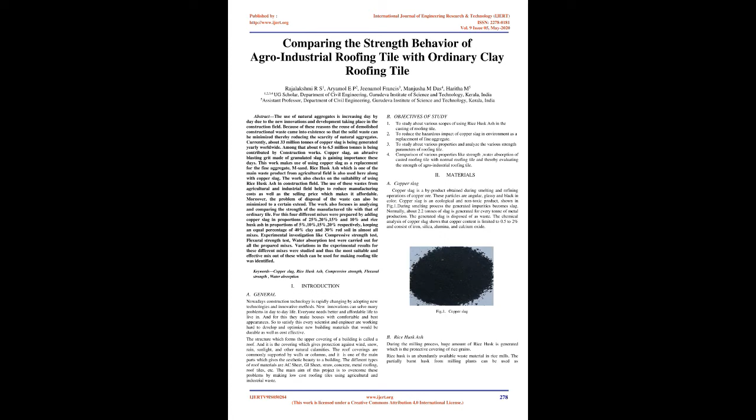The structure which forms the upper covering of a building is called a roof. Fig. 1. Copper slag. It is the covering which gives protection against wind, snow, rain, sunlight, and other natural calamities. The roof coverings are commonly supported by walls or columns, and it is one of the main parts which gives the aesthetic beauty to a building.

The different types of roof materials are AC sheet, GI sheet, straw, concrete, metal roofing, roof tiles, etc. The main aim of this project is to overcome these problems by making low-cost roofing tiles using agricultural and industrial waste. During the milling process, a huge amount of rice husk is generated, which is the protective covering of rice grains. Rice husk is an abundantly available waste material in rice mills.

The partially burnt husk from milling plants can be used as fuel in the boilers for processing of paddy. It is also used as a fuel for power generation. The non-crystalline silicon dioxide is the main constituent of rice husk ash. It possesses a high specific surface area. The main property of silicon dioxide is its high pozzolanic reactivity, as it contains about 90% silica.

Red color is imparted to the soil when it occurs as hematite or as hydroferric oxide, and yellow color is imparted when it occurs in hydrated form as limonite. Generally surface soil is red in color and the horizon below the soil gets yellowish in color. The rice husk ash is shown in Fig. 2.

Specific gravity, Gs, equals (W2 - W1) / ((W4 - W1) - (W3 - W2)), where W1 equals weight of pycnometer, W2 equals weight of pycnometer plus material, W3 equals weight of pycnometer plus material plus water, W4 equals weight of pycnometer plus water. Note, all weights are taken in grams. Fig. 2. Rice husk ash.

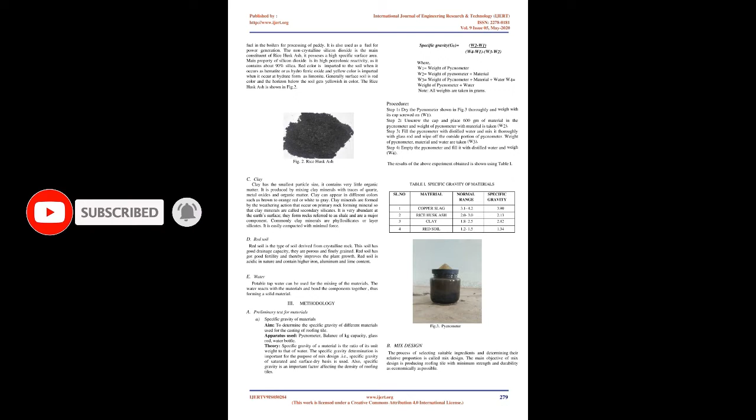Step 3. Fill the pycnometer with distilled water and mix it thoroughly with a glass rod and wipe off the outside portion of the pycnometer. Weight of pycnometer, material, and water is taken, W3. Step 4. Empty the pycnometer and fill it with distilled water and weigh, W4. The results of the above experiment are shown in Table I.

Clay. Clay has the smallest particle size, it contains very little organic matter. It is produced by mixing clay minerals with traces of quartz, metal oxides, and organic matter. Clay can appear in different colors such as brown to orange, red or white to gray. Clay minerals are formed by the weathering action that occurs on primary rock-forming minerals, so clay minerals are called secondary silicates. It is very abundant at the Earth's surface.

They form rocks referred to as shale and are a major component. Commonly clay minerals are phyllosilicates or layer silicates. It is easily compacted with minimal force. Red soil. Red soil is the type of soil derived from crystalline rock. This soil has good drainage capacity, they are porous and finely grained. Red soil has good fertility and thereby improves plant growth. Red soil is acidic in nature and contains higher iron, aluminum, and lime content.

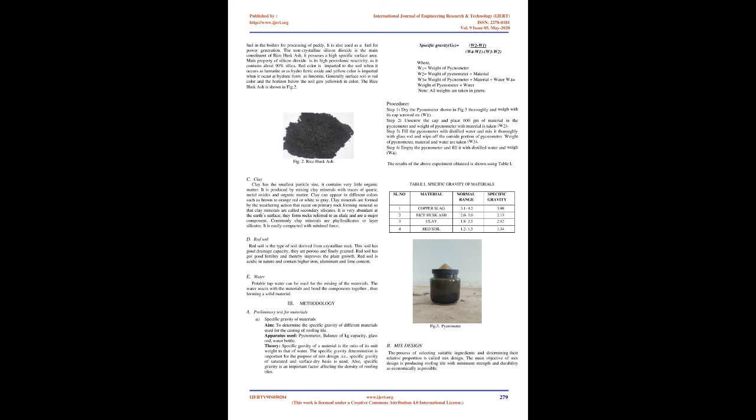Water. Potable tap water can be used for the mixing of the materials. The water reacts with the materials and bonds the components together, thus forming a solid material. Methodology. Preliminary test for materials. Specific gravity of materials. Aim: to determine the specific gravity of different materials used for the casting of roofing tile. Apparatus used: pycnometer, balance of kg capacity, glass rod, water bottle.

Theory: specific gravity of a material is the ratio of its unit weight to that of water. Fig. 3 pycnometer. The specific gravity determination is important for the purpose of mix design, i.e., specific gravity on a saturated surface dry basis is used. Also, specific gravity is an important factor affecting the density of roofing tiles. Mix design. The process of selecting suitable ingredients and determining their relative proportion is called mix design. The main objective of mix design is producing roofing tile with minimum strength and durability as economically as possible.

Mix ratio. 4 different mixes were prepared for this work. 3 specimens are cast for each mix ratio and the final result was calculated by taking the average of these. Mix ratios that were used for casting of roofing tile are depicted in Table 2. Table 2. Mix ratio.

Testing of specimen. The remolded specimens, after being dried in sunlight and burned for a sufficient time period, are taken out and tested under standard testing apparatus. The tests that were performed for roofing tiles include the following: water absorption test, flexural strength test, compressive strength test. Water absorption test. Aim: to determine the percentage of water absorption of roofing tiles. Apparatus required: a sensitive balance.

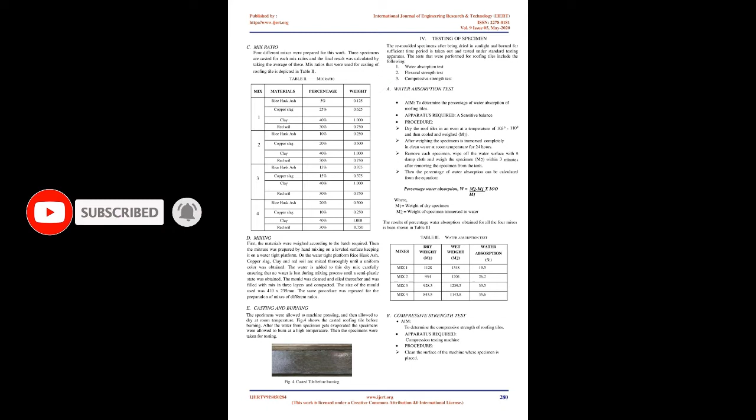Then the percentage of water absorption can be calculated from the equation. Percentage water absorption, W equals (M2 minus M1) divided by M1, times 100. Mixing. First, the materials were weighed according to the batch required.

Then the mixture was prepared by hand mixing on a leveled surface, keeping it on a watertight platform. On the watertight platform, rice husk ash, copper slag, clay, and red soil are mixed thoroughly until a uniform color was obtained. The water is added to this dry mix, carefully ensuring that no water is lost during the mixing process until a semi-plastic state was obtained.

The mold was cleaned and oiled thereafter and was filled with mix in 3 layers and compacted. The size of the mold used was 410 x 235 mm. The same procedure was repeated for the preparation of mixes of different ratios. Casting and burning. The specimens were subjected to machine pressing, and then allowed to dry at room temperature. Fig. 4 shows the casted roofing tile before burning.

After the water from the specimen gets evaporated, the specimens were allowed to burn at a high temperature. Then the specimens were taken for testing. Compressive strength test. Aim. To determine the compressive strength of roofing tiles. Apparatus required, compression testing machine. Procedure. Clean the surface of the machine where the specimen is placed.

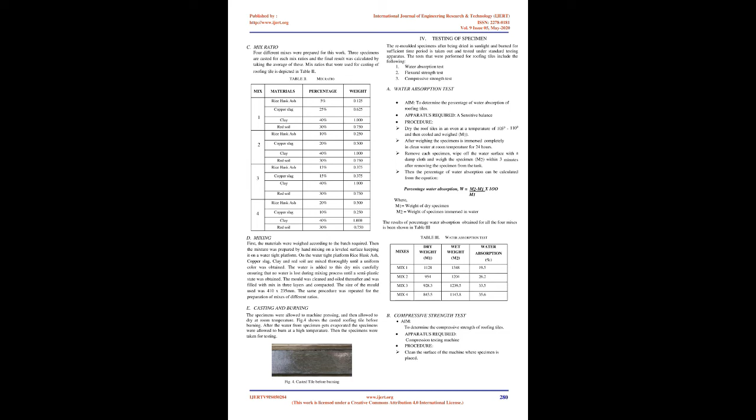Place the specimen on the flat surface and the load is applied continuously. Note the load that breaks the specimen. That will be the breaking load. The compressive strength of the specimen can be calculated by using the equation. Compressive strength equals maximum load divided by cross-sectional area. The results of compressive strength obtained for all the 4 mixes have been shown in Table 4. Table 4. Compressive strength test. Mixes. Load. Compressive strength, N/mm2.

Flexural strength test. Aim. To determine the flexural strength of roofing tiles. Apparatus required, flexural strength machine. Procedure. The machine used for testing flexural strength is a double lever loading machine. And the load is applied to the specimen at the rate of 450 to 550 N/minute as per standard test requirement. Note the breaking load of the specimen. The results of flexural strength obtained for all the 4 mixes have been shown in Table V. Table V. Flexural strength test.

Mixes. Comparison of result. The standard values of clay roofing tiles from IS codes are shown in Table 6. By using these standard values, a comparison was done for the prepared agro-industrial roofing tile in order to find out their strength behavior, which includes the compressive strength, flexural strength, and also the water absorption rate. SL No. Tests. Standard value. 1. Water absorption. 18%. 2. Compressive strength. 8 MPa to 10 MPa. 3. Flexural strength.

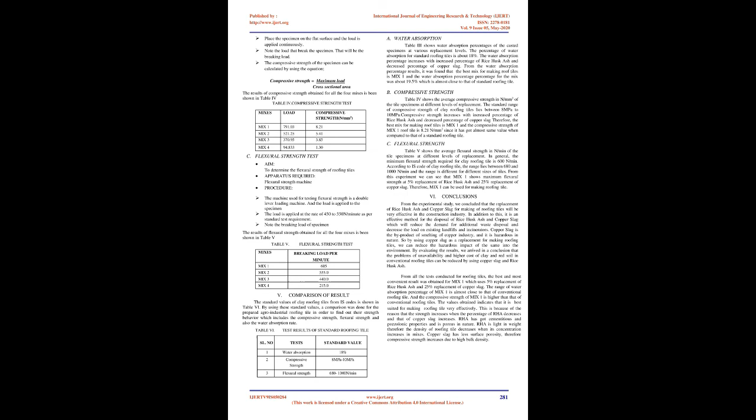Conclusions. From the experimental study, we concluded that the replacement of rice husk ash and copper slag for making of roofing tiles will be very effective in the construction industry. In addition to this, it is an effective method for the disposal of rice husk ash and copper slag, which will reduce the demand for additional waste disposal and decrease the load on existing landfills and incinerators.

Copper slag is the byproduct of smelting of copper industry, and it is hazardous in nature. So by using copper slag as a replacement for making roofing tiles, we can reduce the hazardous impact of the same into the environment. By evaluating the results, we arrived at a conclusion that the problems of unavailability and higher cost of clay and red soil in conventional roofing tiles can be reduced by using copper slag and rice husk ash.

From all the tests conducted for roofing tiles, the best and most convenient result was obtained for mix 1, which uses 5% replacement of rice husk ash and 25% replacement of copper slag. The range of water absorption percentage of mix 1 is almost close to that of conventional roofing tile. And the compressive strength of mix 1 is higher than that of conventional roofing tiles. The values obtained indicate that it is best suited for making roofing tile very effectively.

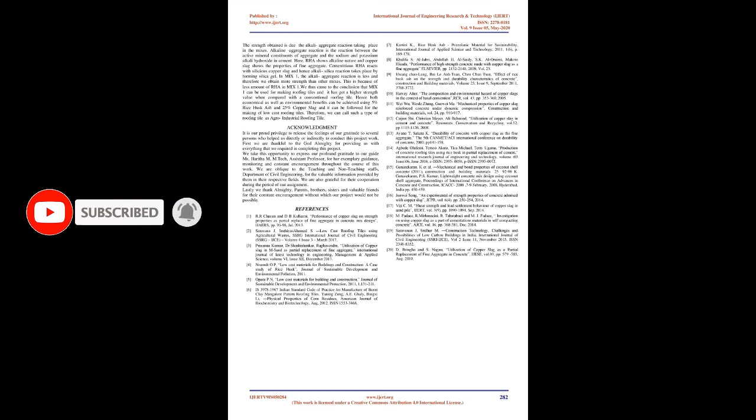This is because the strength increases when the percentage of RHA decreases and that of copper slag increases. RHA has got cementitious and pozzolanic properties and is porous in nature. RHA is light in weight, therefore the density of roofing tile decreases when its concentration increases in mixes. Copper slag has less surface porosity, therefore compressive strength increases due to high bulk density.

The strength obtained is due to the alkali aggregate reaction taking place in the mixes. Alkali aggregate reaction is the reaction between the active mineral constituents of aggregate and the sodium and potassium alkali hydroxide in cement. Here, RHA shows alkaline nature and copper slag shows the properties of fine aggregate. Cementitious RHA reacts with siliceous copper slag and hence alkali-silica reaction takes place by forming silica gel.

In mix 1, the alkali aggregate reaction is less and therefore we obtain more strength than other mixes. This is because of less amount of RHA in mix 1. We thus came to the conclusion that mix 1 can be used for making roofing tiles and it has got a higher strength value when compared with a conventional roofing tile.

Hence both economical as well as environmental benefits can be achieved using 5% rice husk ash and 25% copper slag, and it can be followed for the making of low-cost roofing tiles. Therefore, we can call such a type of roofing tile as agro-industrial roofing tile.